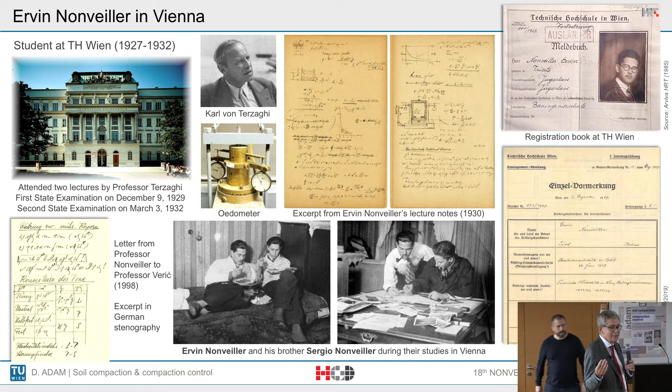If you look at what Professor Nonveiller and Professor Terzaghi left behind, here's an impression from the year 2019. Here, beneath, the president from this time, Igor Sokolic, visiting us in Vienna. We had the Austrian Geotechnical Conference with the Vienna Terzaghi lecture together with Professor Brandl. Then some weeks later we saw each other again in Omiš, with the 17th Nonveiller lecture of Professor Bala from Italy, and the amazing presentation from Professor Verić. It was really wonderful work.

You even presented that time about Terzaghi and the Croatian connection, and we talked about Terzaghi in the laboratory a lot, before and after. I told Professor Verić there were just a couple of weeks remaining to visit the old laboratory, because we were moving it. So a Croatian again was the last one to see our old laboratory, founded by Terzaghi, during his visit to Vienna in May 2019. This, for instance, is the first triaxial apparatus which was developed. But no worries, we could save exactly this room, and during the next international conference, which will take place in Vienna in 2026, we will officially open the archive of Terzaghi, so everyone who is interested can see it again. But you were the last who could see it in person before we moved the laboratory.

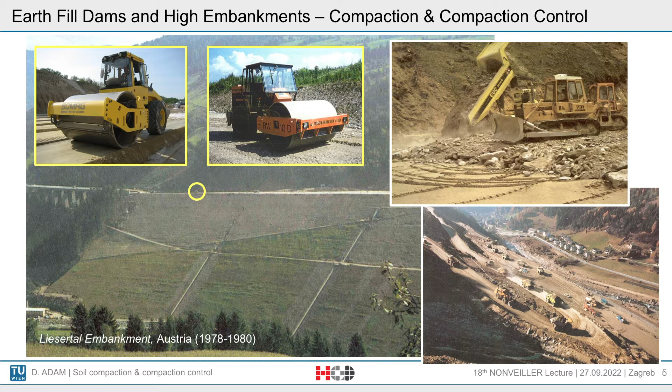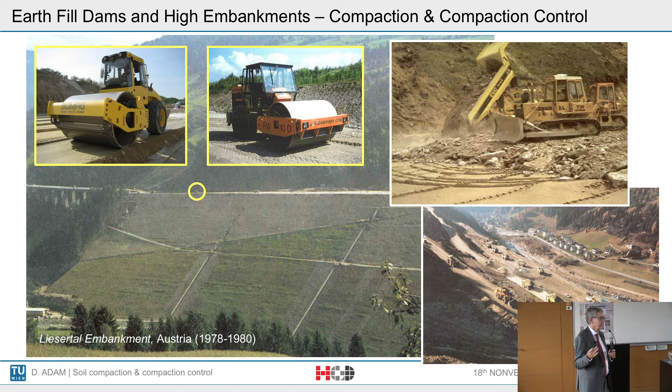This is an old roller, this is a modern roller. At this time, in the end of the 70s, the technology was right at the beginning, but nevertheless it could be done that the self-settlements were in the range of about 8 to 15 per mil, which is not too much, taking into account that the whole embankment was made of clay, silts, and silty sands - less suitable material, but finally it worked.

As already mentioned, it was in October 1992 when Professor Brandl invited me to form this group for soil dynamic research. Within those 30 years we did a lot of projects I've listed here. I won't go into detail - it's not possible to talk about all of them, so I have chosen some of them.

I will definitely talk a little about the dynamic load plate test as a spot test, but the main part of my presentation will cover dynamic roller compaction and continuous compaction control, as everybody can expect. I've also seen in the poster - thanks for designing it so nicely - that you obviously have expectations with respect to this topic.

Then, if there is time, some words about deep vibro compaction and new developments - it was also a wish of Igor to talk about that. And finally, recent research on compaction in railway engineering, in particular about condition-based tamping process.

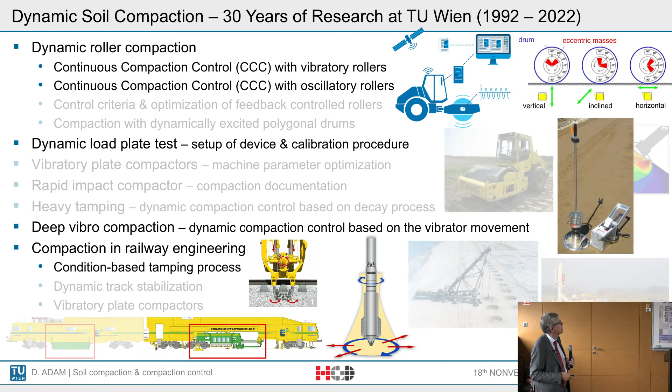But before we start with all these developments, I would like to give an overview of the fundamentals of soil compaction as a kind of warm-up. Most of you will be familiar with this, but I think it is necessary to be aware of what it means to compact, because we always have to deal with a very special material, and this special material is soil. We can classify soil according to grain size, as we all know.

So we have the coarse-grained part and the fine-grained part, but moreover we have to take into account surface roughness and grain shape - which is well known because it's visible to the eye for coarse-grained material, but not so obvious for fine-grained cohesive soil. Taking into account mineral content, we also have to look at consistency and plasticity - properties which significantly influence the behavior of the soil.

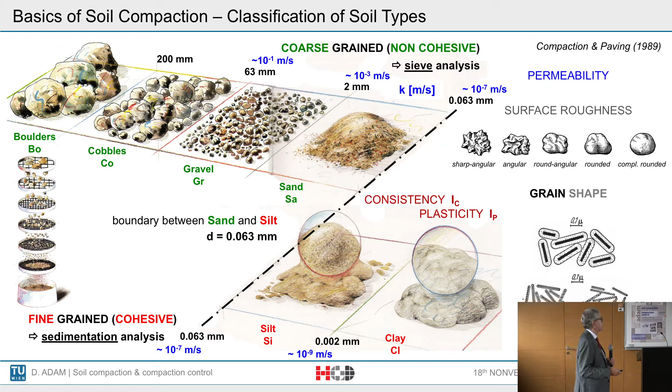Moreover, the influence of water and permeability is also a very important aspect that always has to be taken into account. But it's not only the grain size, it's also the grain size distribution which has to be considered.

If you look at some typical grain size distributions - mainly gravels, uniformly graded, intermittently graded, or well graded - they are all very suitable materials for embankment construction, dam construction, and earthworks in general, so they can be well compacted. If you look at sands - yesterday we had an interesting talk about that - sands are problematic soils to compact, so some other aspects have to be taken into account.

The mineral content again - we should always try to have some kind of cementation, but it depends on whether the soil is calcareous or not, for instance. Or if possible, we should try to have a very specific water content to gain a kind of apparent cohesion.

Nevertheless, sand compaction is a very difficult task. Widely graded grain size distributions are well suitable, and we also have to focus on fine-grained soils, which are usually problematic to compact, and sometimes it's necessary to stabilize them with lime, cement, etc.

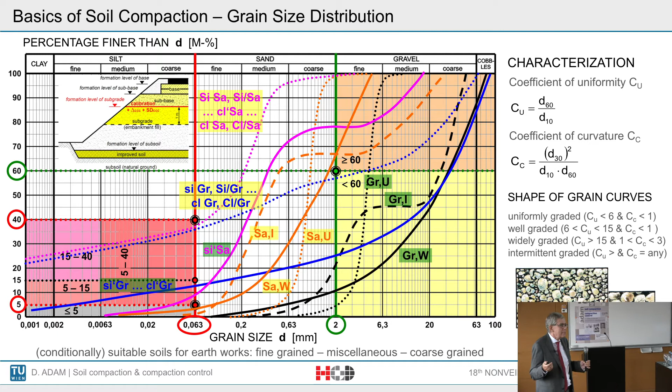But we always have to handle all these kinds of materials because we just have to use the materials which are available. And if they're, for instance, only clay silts, then we have to deal with them. That is the reason why I have to focus on all of them.

But it is not grain size distribution alone. Moreover, we have to take into account that soil is a three-phase system, to say it in simplified words. We all know this phase diagram shown here on this slide. Besides the soil particles, we have voids, and the voids are partly or fully filled with water. In the dry condition, there is only air in the voids.

If you look at the structure of the soil, here in both graphs below: fine-grained soil with a closed void space but nevertheless a quite large void space, and a coarse-grained soil with an open void space but a relatively small void ratio. We can define a lot of numbers - for instance, the degree of saturation, or the void ratio, as presented here.

Taking these factors into consideration, we can look at one of the most important relationships with respect to compaction: the dry density depending on the water content. This can be shown graphically here. Every one of us knows this dry density over water content relationship.

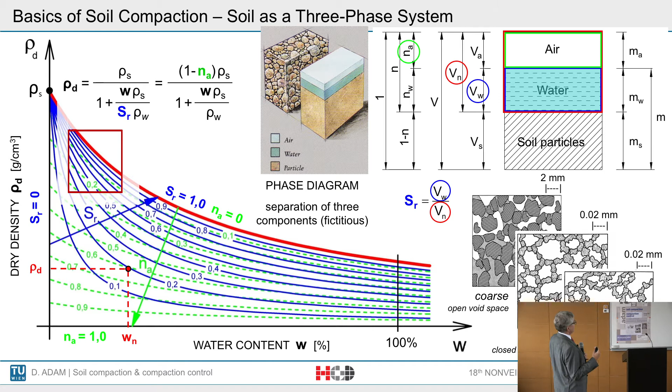If you look into detail of that, we can get insight into the compactability of the soil, into the compaction procedure, which is usually done in the laboratory with the Proctor test.

We all know this test - the standard Proctor test yields, for instance, this Proctor curve. That means there is an optimum water content where we gain the maximum dry density. If we apply more energy, as presented here in the modified Proctor test,

we see what we expect: the dry density is higher, but the optimum water content is lower. The explanation is quite simple - the void volume is much smaller and there's not so much space for water there.

What we can see here is the line of full saturation, and here the line for a saturation degree of 70%. The maximum dry density is always in between here. So what do we get out of this test?

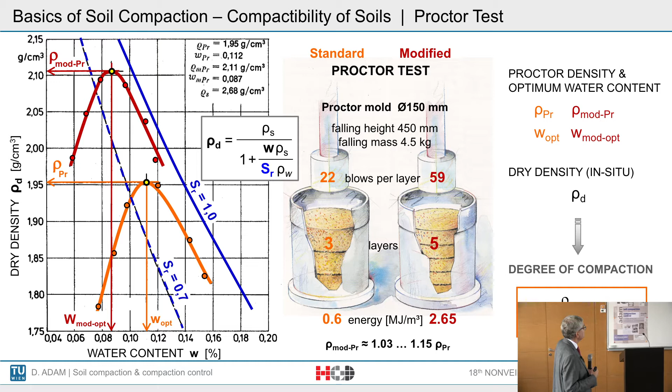Proctor density and optimum water content, both for the standard and modified Proctor test. When we compare it to the dry density which we gain in situ, we can define the degree of compaction as presented here. We'll go into that a little bit later because it's an important relationship.

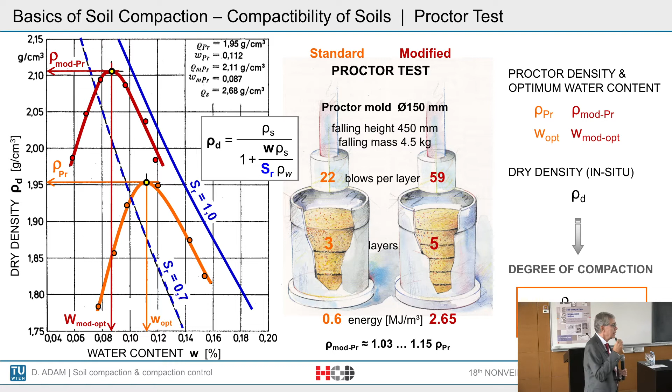This Proctor curve is a real property of each soil, and for each soil you will gain a different curve. On the left-hand side, we can see typical Proctor curves for gravel and sand. For sands, they're very flat, very shallow - that means there is not a big compaction potential.

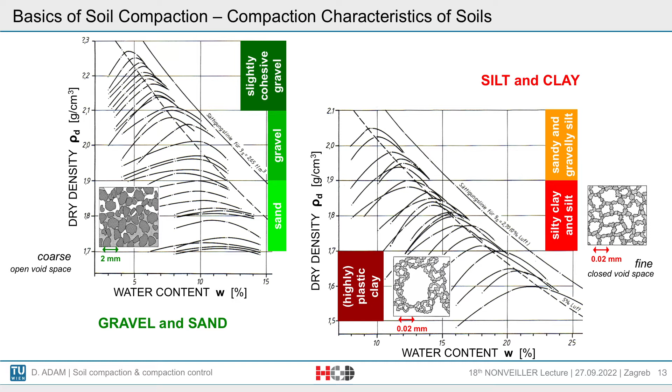We can also see that the dry density which can be achieved is quite low. If we look at the right-hand side, the silty clays, in general the level of dry density is lower. There is one main reason for that: the closed void space, so more energy is needed to gain higher compaction, but the energy applied is defined by the Proctor test, so the maximum dry density we can achieve is definitely lower.

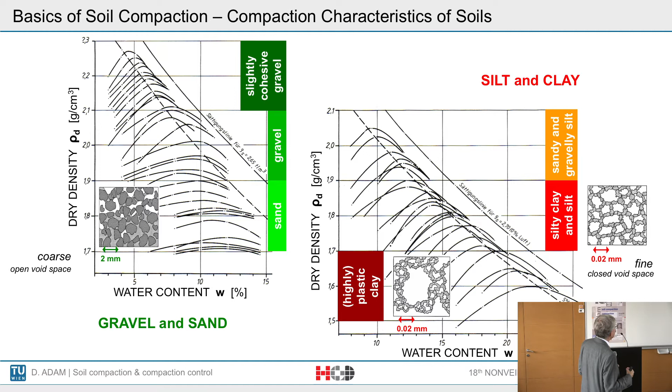If you look at the general properties of soil, the typical soil characteristics, we can see that gravel and sand on one hand - the coarse-grained soils - and the silts and clays, the fine-grained soils, behave totally differently.

I do not want to go into detail of that because I think you will get all the slides afterwards to have a view on that. But I would just focus on

the compaction, because if you take into account how compact gravel and sand on the one hand and silt and clay on the other hand, we see totally different techniques have to be applied.

So for coarse-grained soil, what shall be done? A virtual elimination of internal friction. That means a rearrangement of particles into denser fit, as we can see here, for instance. Vibrations are most effective for compacting gravel and sands, and that is the reason why it makes sense

to apply vibrations, that means a dynamic load, to compact gravel and sands in the best way. On the other hand, if we have a look at the structure of silts and clays, what do we have to do? We have to exceed the cohesion forces. That means we need to squeeze out the water and the air out of the closed voids. Vibrations, dynamic loads, are definitely not the best technique to achieve this. The best one is to apply a dead load, a static load, or to open the closed void space by kind of a kneading process.

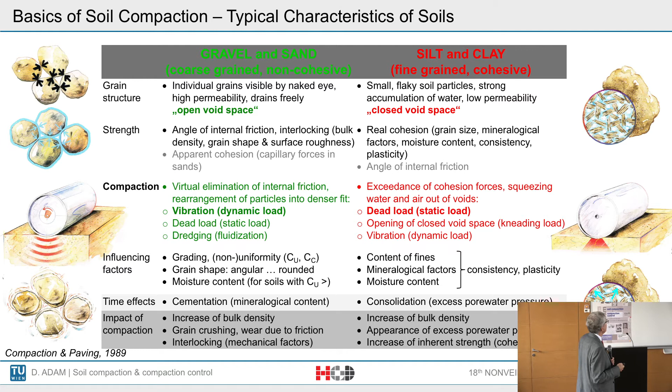There are many aspects influencing this compaction, but we will definitely talk about dynamic compaction a little bit later on. Before we do this, I would like to talk a bit about the conventional compaction controls - that means the state of the art, but also the innovation in this field.

So we all know that we can directly measure the density. On the one hand, we can perform the Proctor test - usually the standard Proctor test, but sometimes also the modified one. So we get the Proctor density, and this Proctor density we compare with the density determined in the field, which can be done by replacement methods, sand or water for instance, or tube sampling for cohesive soils, or the application of the nuclear gauge method.

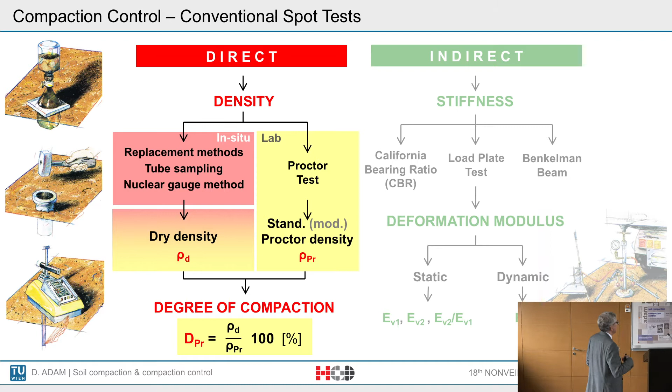If we compare the dry density from the field with the Proctor density, we get a degree of compaction multiplied by 100%. But we all know that this kind of testing is not really very reliable - it is spot testing. I was never happy with that, and I would say a bit better method was to measure stiffness,

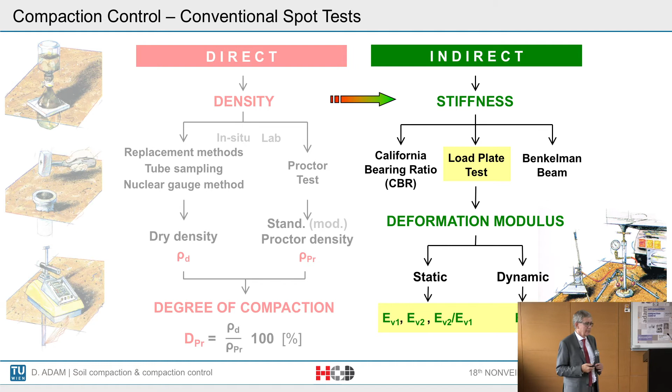because what we know is, the denser a soil is, the stiffer it reacts. So this is one basic principle - that means we can also indirectly measure compaction by stiffness measurement. So we have different possibilities. California bearing ratio, we usually don't use in Austria. Benkelman beam is an anachronism, it's decades ago that we used it.

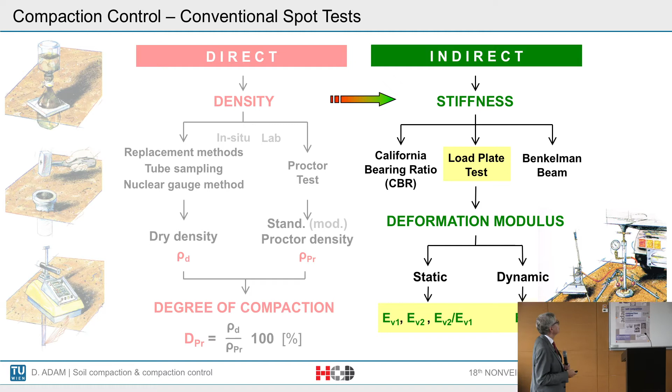So we mainly use load plate tests - on the one hand static ones, on the other hand dynamic ones - in order to determine the deformation modulus for different loadings. Before we go into detail on that, some words about the comparison of density measurement and stiffness measurement.

Here at the top we see a typical compaction curve from the Proctor test and the requirement of 97% of Proctor density. And below, we also can draw the so-called transformed compaction curve, which is derived from stiffness measurements. We can see there is no coincidence in the requirements. So we cannot really say if we have achieved sufficient compaction, it's also stiff enough, and the other way around. If you're outside of this whole area, there is a common rejection.

How do we deal with these yellow marked areas? Here on the left-hand side, we have sufficient stiffness but no sufficient density, so stiffness measurement pretends, let's say it that way, sufficient density. And here on the right-hand side, the other way around - there is no sufficient stiffness but sufficient density, and in this case density measurement pretends sufficient stiffness, but it is not existing.

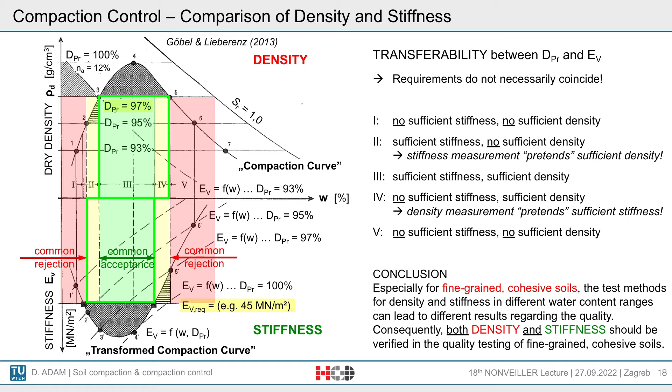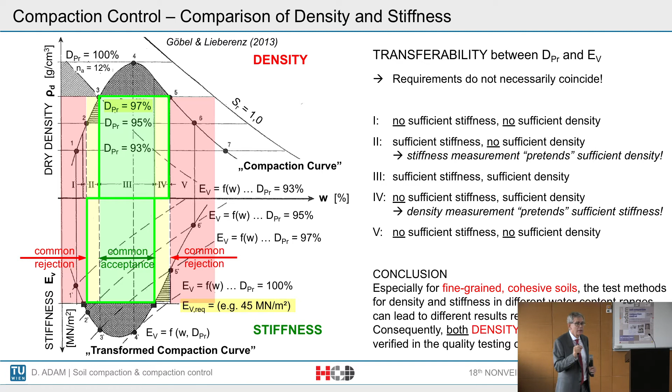So what is the conclusion out of it? This is valid especially for fine-grained cohesive soils. Always both density and stiffness should be verified in all the quality testing processes, in particular for the fine-grained cohesive soils. Many people in practice are not aware of this, and also in theory they're not aware of this. Stiffness and density are not exactly the same - they are correlating, but we also have to take into account what is the requirement, what is the definition, what would we gain, stiffness or density.

So coming now to the spot tests.

Static load plate tests - every one of us knows about it, and I've learned that also in Croatia, this is one of the main equipment to do all the testing in earthworks for road embankments, dams, etc.

Sometimes also this compaction rate is applied. To be honest, this is soil mechanical nonsense. I know it is in all the standards, all over the world. It's not time to talk about this in detail, but if you're interested, we can discuss it later. We did a lot of research on this, and we tried to expel it from the standards, but it's not possible, even not in Austria. I remember Professor Brandl talked about this too, and I can imagine he talked about it in his first Nonveiller lecture as well. I've learned his topic was more or less the same as mine - in 2000, when he delivered his first presentation.

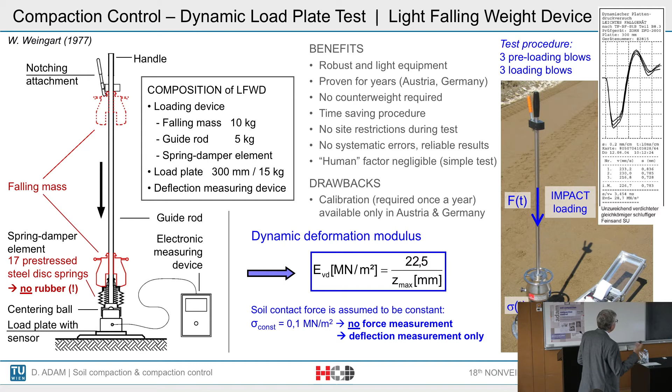So we did a research project to get insight into whether and why this simplified evaluation is also reliable. In the next three slides, I want to show you how we do our research in soil dynamics. We always do large-scale experimental tests compared with calculations.

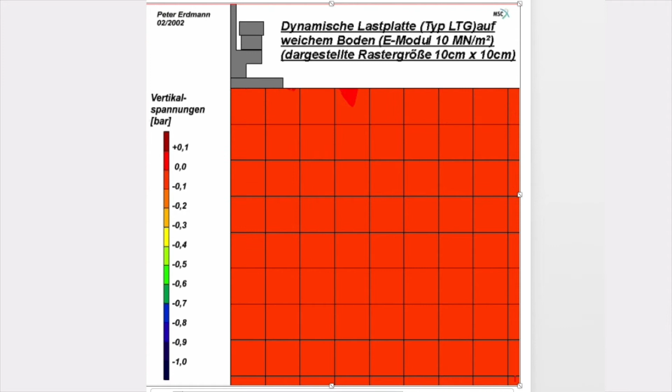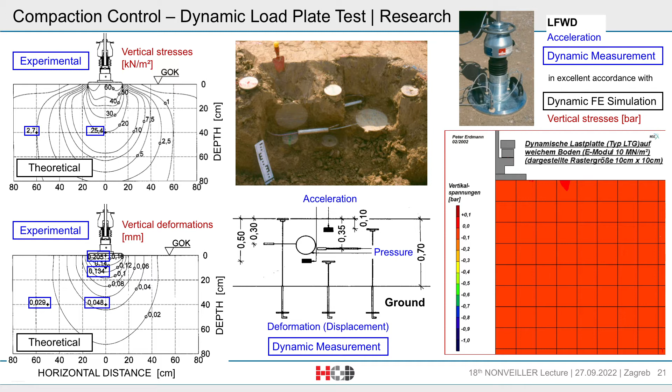On the other hand, both on the equipment and also in the soil, we measure acceleration, but also pressure, deformations or displacement, everything dynamically with very high precision. The comparison on the left-hand side shows that the calculation and the experimental results really fit very well.

So what did we do? We have the free body system here, and we take into consideration the upper one. We have both the soil contact force and also the soil contact pressure and the plate deflection. We did the calculation, and what we saw, due to a relatively high variation of the modulus, was that the variation of the soil contact force was insignificantly low, so it was more or less constant. At the same time, there was a significant variation in the plate deflection.

So a quite easy conclusion out of that: we always have this soil contact force of about 7 kilonewton, corresponding to a stress of 100 kPa. That means it is right that no force measurement is required because this number is more or less constant, and only deflection measurement is necessary. That means keeping this stress constant is okay, and from this point of view the simplified formula can be applied.

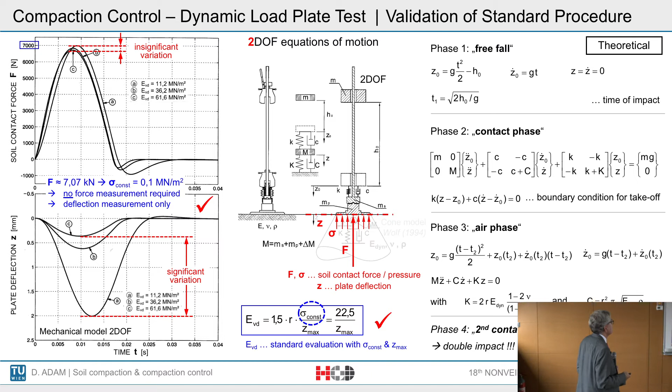That means a linear elastic spring and a viscous damper, and we feed this simplified model with the measured acceleration of the plate, which is integrated to get the plate velocity, and integrated twice to get the plate deflection. So we have the plate deflection here, and the soil contact pressure we can calculate simply from the equation of motion, which is well known.

But what did we do now? We just take into account the elastic part, we separate it. Why do we do that? Because also in the simplified calculation we just consider a constant stress. That means we compare this equation to each other — on one hand we have the so-called deformation modulus K determination with the elastic part, we can see here this part, and what we get out of it is a linear relationship.

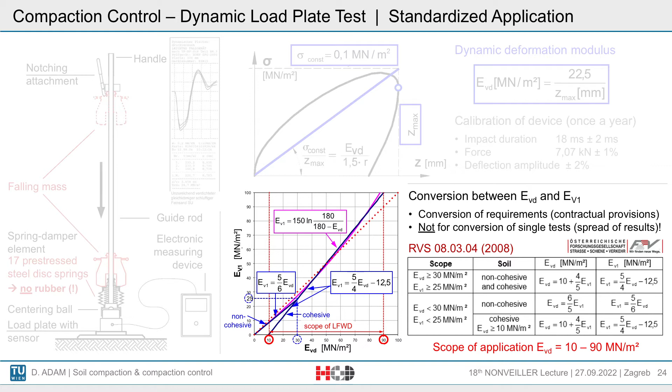We can see a very cleverly tuned system already done in 1977 by Wolfgang Weingart in Eastern Germany, with a very simplified evaluation. There is only one drawback, maybe here in Croatia if you would like to apply it: this equipment needs a calibration once a year.

This calibration can only be done now in Austria and in Germany. But I've seen it's not a problem. We do the calibration here in Vienna. We get a lot of load plates from Hungary and other countries, so it should be done. Maybe you install also such a calibration procedure here at the university or wherever.

Then I think you have a very good alternative to the static load plate test. I haven't used the static load plate test now for almost 15 years, because from my point of view it is an anachronism. But if you have nothing better, it is the best one to apply.

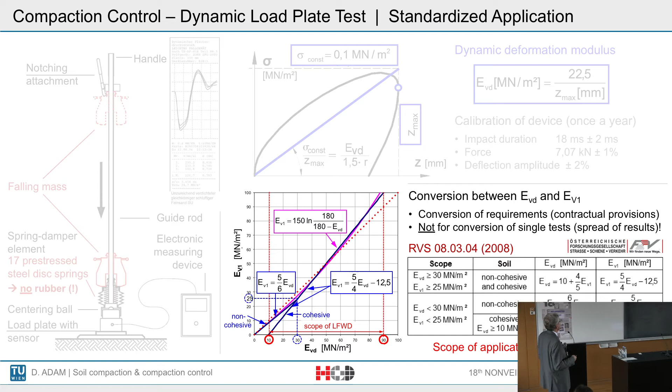But this would be a real progress to apply this dynamic load plate test. You have only advantages. It's a very short procedure. You have no human aspect, etc. But there are even better techniques I would like to talk about now.

Now I come to the core part of my presentation, to the dynamic roller compaction, and sure, the roller integrated continuous compaction control. It's always a pleasure for me to talk about it, because it was here the topic of my PhD thesis long time ago.

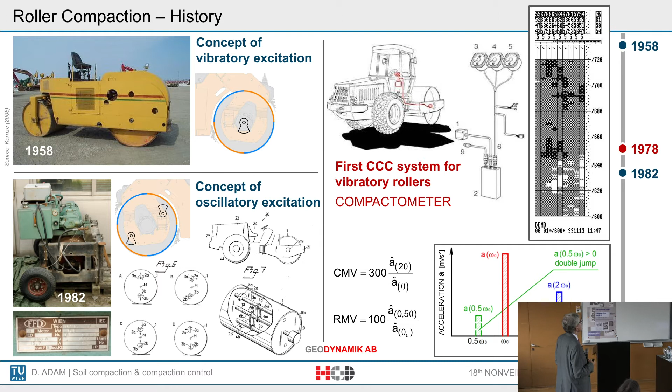But having a look to history, the concept of vibratory excitation was already established in 1958. So it's on the one hand quite long time ago, on the other hand it's not so long. Precisely 20 years later, the first CCC system for vibratory rollers was developed from the Swedish company Geodynamik AB. Just 4 years later, this small company of 7 people also developed the concept of oscillatory excitation.

It was at Otok Rab, and I remember well as if it was yesterday, when I was playing in sand every day in the morning. After the flood was over, the sand was wet, and it was not possible to construct nice sand castles, because the sand was flowing through the fingers. Then during the day it was made possible, and I realized as a 5 year old guy there must be a connection with water. So it was drying up a little bit, and then we built this, and we could even construct tunnels. It did not collapse, but in the evening, when the sun burned down and it dried out, it collapsed.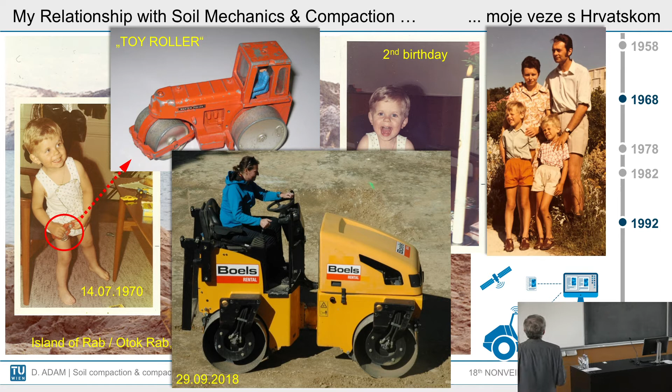Yeah, so 4 years ago, and you can see she had really fun with compaction. Yeah, so obviously it was laid into my cradle to behave with soil dynamics, and especially with rollers. Okay, coming back to some more serious aspects.

Which rollers are available nowadays? On the one hand, static rollers, on the other hand, dynamic rollers. So we'll just talk about the dynamic rollers.

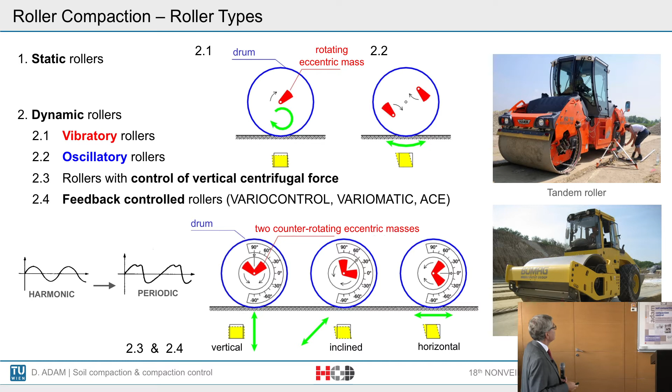Vibratory rollers have one rotating eccentric mass at the axle. Oscillatory rollers have two eccentric masses apart from the axis but rotating in the same direction. Then we have rollers with control of the vertical centrifugal force. This means there are two counter-rotating eccentric masses, and the whole excitation unit can be rotated in order to gain exclusively vertical, any inclined, or exclusively horizontal excitation. So it is more or less a combination of a vibratory roller and an oscillatory roller. The last step in development was the idea of the so-called feedback-controlled rollers, which I will also talk about briefly.

Going a bit more into detail about vibration, vibratory compaction works in the way that the eccentric mass in the drum axis is rotating in the form of a circular translatory vibration of the drum. So we gain mainly a vertical loading and a better compaction depth compared to all other systems.

We have to take into account that there are 5 different modes of operation, which I will talk about on the next slide. But first of all, let's have a look at the oscillatory compaction.

There are 2 eccentric masses now. They're eccentric but point symmetric to the axis, meaning the distance to the axis is the same. They have the same sense of rotation, forming a sinusoidal torque around the drum axis, meaning a kind of shear force is produced. The main advantage is that there are very low ambient vibrations due to that.

There are also some modes of operation, which I will not go into detail about. How do we apply vibratory rollers? More or less for all dynamically compactable soils and materials, meaning, as we already learned, coarse-grained materials, mixed-grain materials, and in some cases also fine-grained materials. It is the mainly used roller worldwide.

Oscillatory rollers are employed in the vicinity of sensitive structures, meaning near bridges or in urban areas, in order to reduce vibrations. It is a perfect tool to seal surfaces, on the one hand for asphalt, and on the other hand also for mineral base layers.

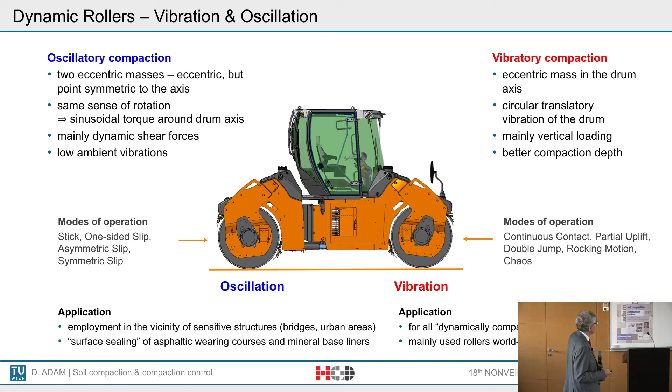If you have a look now at the modes of operation of a vibratory roller, this was one of the main outcomes of my PhD thesis in 1996, already a long time ago. We found out that there are 5 different modes of operation. So there is continuous contact.

This is the soil contact force. There's always contact between the roller and the soil. And if the soil stiffness is increasing, there is a partial uplift, meaning there is a take-off, an air phase, a very short one, within every excitation round. And if the soil stiffness gets even stiffer, then we have the operating mode of double jump.

What does double jump mean? You can see only every second cycle of excitation there is a repetition of the signal. That means there is a heavy impact and a light impact following it, and in between we have a quite long air phase.

About rocking motion and chaotic motion, I don't need to talk much, so the drum becomes imbalanced. If you think about application of continuous compaction control, it can be ideally applied within the operating condition of partial uplift, also within continuous contact, depending on the system, maybe with double jump, but definitely not for rocking motion and chaotic motion.

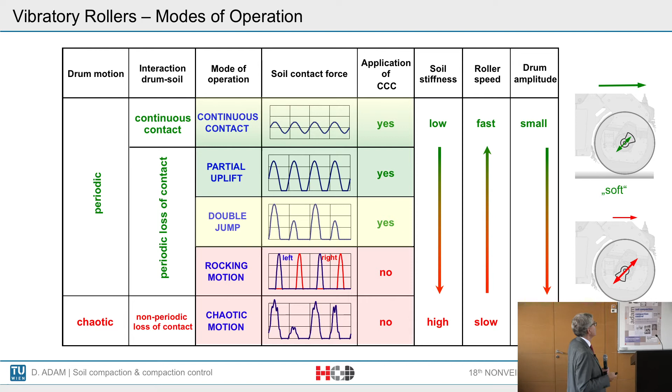And what does continuous compaction control mean? It is nothing else than the measurement of the motion behavior of the drum at the bearing of the drum with accelerometers. Receiving such signals, we can see here the acceleration, which conforms to the force.

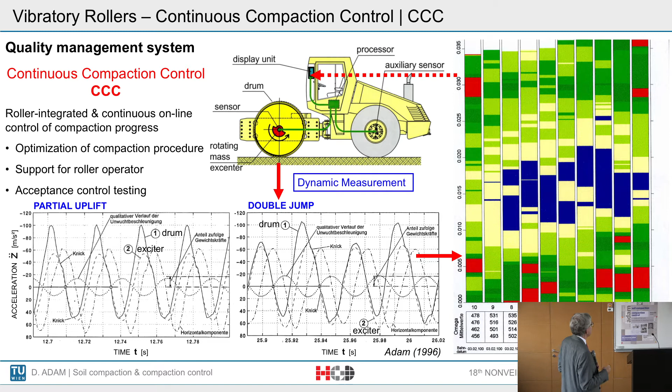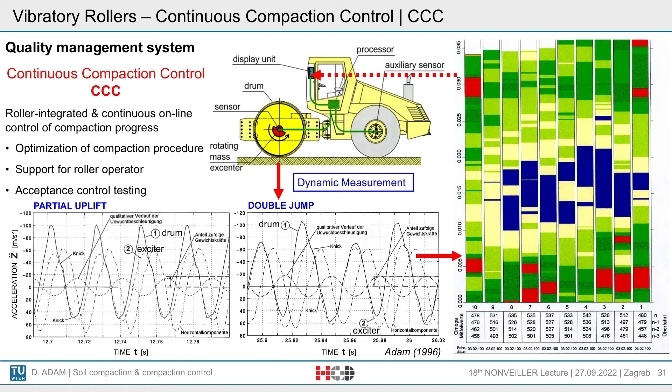Here, this line, number 1, is the acceleration of the drum. Here, the dotted line is the exciter, and the area between represents the soil contact force—on the left hand for partial uplift, on the right hand for double jump. Now, if we evaluate exactly these acceleration measurements, we get continuously, all over the compacted area, such a picture.

That means different colors representing different values and stiffnesses. And if you have a look into detail how the systems can be applied, on the left-hand side above, we...

We have the first indicator for vibratory rollers, the so-called compactometer value, which is evaluated in the frequency domain. That means we just compare the amplitude of the double excitation frequency with the amplitude of the excitation frequency, forming the so-called compactometer value. All the other systems are based on evaluation in the time domain.

The first of those was the so-called omega value, based on the evaluation of the energy transmitted to the soil. The area between the soil contact force-displacement curve is the energy transferred to the soil. Further developments show the Evib value, which is the inclination of the soil contact force-displacement relationship during the loading phase.

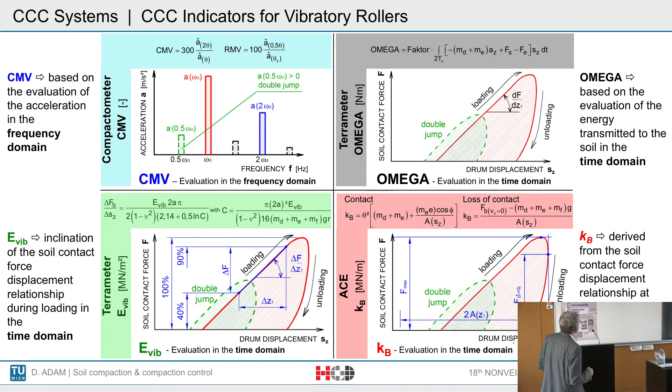But as you can imagine, this is not the real stiffness, because this is just the loading response. It's not the stiffness, because the actual stiffness lies somewhere in between, as we already saw in our research on the dynamic load plate test. The kB value is very similar—it's derived from the soil contact force-displacement relationship at the maximum drum deflection. So we have four systems, and we really had to check whether they reveal stiffness, compaction, or something else.

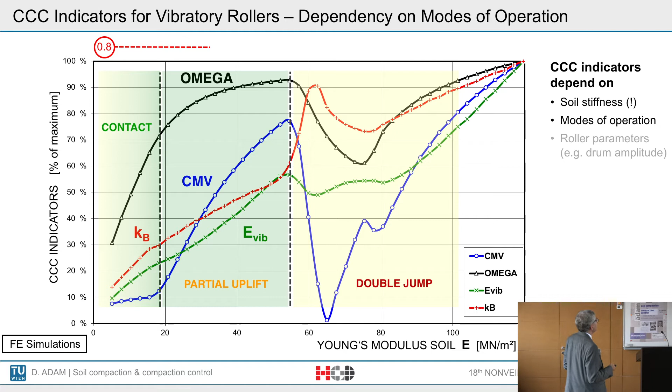And what does it depend on? The modes of operation. We have contact with partial uplift, and contact with double jump. This is the answer to why continuous compaction control should always be applied during partial uplift—then all four indicators give reliable results.

So we did the research—it's not so long ago, just a couple of years, about 7 years ago. We investigated the dependency on all other machine parameters and operating parameters. For instance, you can see here an artificial weak spot, and all CCC indicators detect this weak spot.

So we have here a variation of roller speed: 2, 4, and 6 km/h. What we can see is that, in tendency, the values get a bit lower, meaning the soil seems to appear softer at higher roller speeds. The time domain-based values—omega, Evib, and kB—are obviously less sensitive compared to the frequency domain-based CMV.

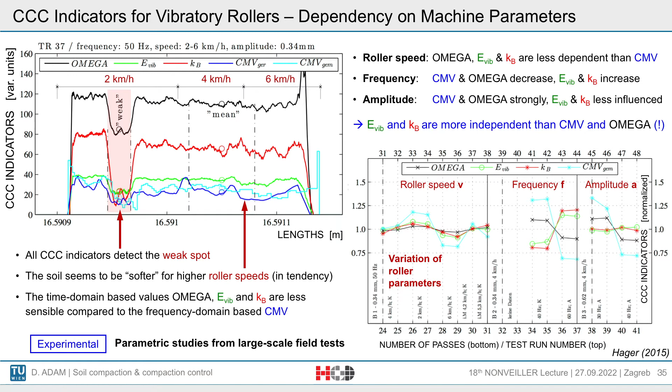We did some more variations, for instance of frequency and amplitude. Looking at frequency, CMV and omega decrease while Evib and kB increase. Looking at the amplitude variation, CMV and omega are strongly influenced by the amplitude, while Evib and kB are more or less uninfluenced.

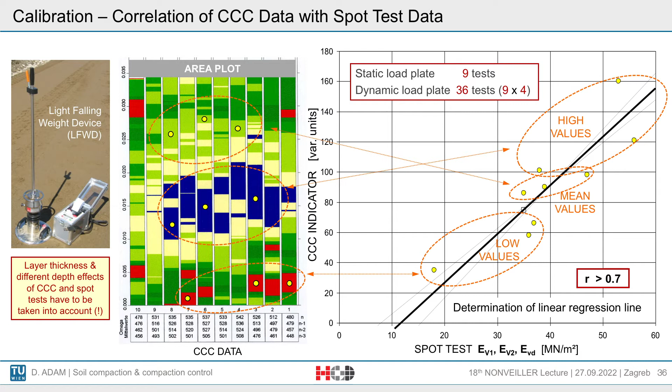This is one of the hurdles in applying CCC, because we only get relative values, not absolute values like the static or dynamic deformation modulus from the load plate test. So what to do? There is a simple answer: do a calibration.

But this calibration has to be done not for every layer, but for all typical soils. And we have to take into account the different depth effects between continuous compaction control—which is about 1.5 to 2 meters—and spot tests like static and dynamic load plate tests, which only reach 50 to 60 centimeters. So there's a real gap in between.

We have to take that into account. But nevertheless, we can do it if we know what we do. And what we recommend now in our standard is to select low values, which are the red areas, to select mean values from the blue areas, and to select high values from the green areas. So we can determine the linear regression line, and if the regression factor is larger than 0.7, then it is okay.

And what we are doing now, we are setting limits. So we start with a reference modulus. For instance, this is 35 meganewton per square meter, just to give you an example. And then we have a procedure defined in our regulations already from 1999 to gain a so-called 80% minimum value, a minimum value, a mean value, and a maximum value.

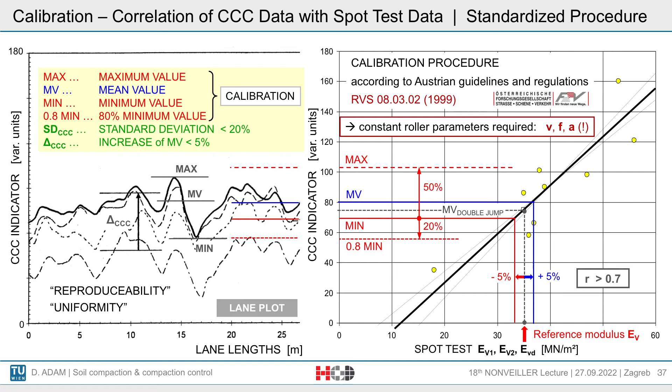And if we compare it now with a typical result, with a lane plot over 25 meters here, then we can see 4 different roller passes. We can clearly see the increase of them, the first, the second, the third, and the fourth. We can clearly see that the results are reproducible, and we can have a look if they're uniform or not. Here they're obviously not very uniform.

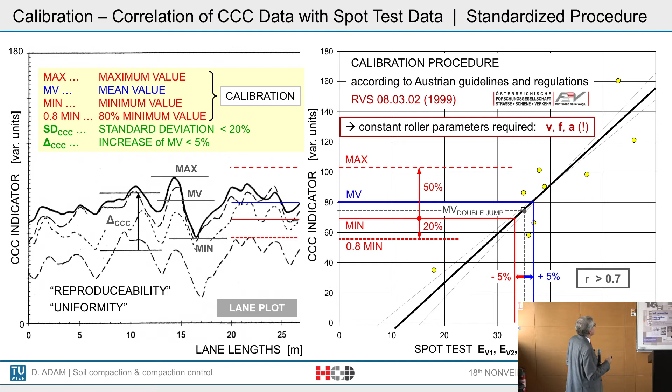That means we have two more aspects we can take into account. On the one hand, the increase of the mean value. If it is less than 5%, almost no more compaction is possible with this applied roller. And we also can define the standard deviation. The big advantage of these two aspects is that no calibration is needed for them. For all the others, we need a calibration.

So having a look, concluding to all the procedure, what has to be done in the beginning: first of all, measurements, setup of correlation according to the standard we've already designed, as mentioned in 1999, and then setting of the limits. It is important to define the lanes, the positioning of the roller. Nowadays, it is done GPS-based, so it is quite simple.

And now we start. With the first pass, what we can see here, a lot of red spots. That means, obviously, insufficient compaction. So we have a limit check here of all the defined limits. We have a compaction progress check, and we have the uniformity check.

Okay, here, obviously, we see no sufficient compaction, second pass. Looks much better, but still some red spots here. Third pass, everything's green. And the limit check says, okay, everything's okay.

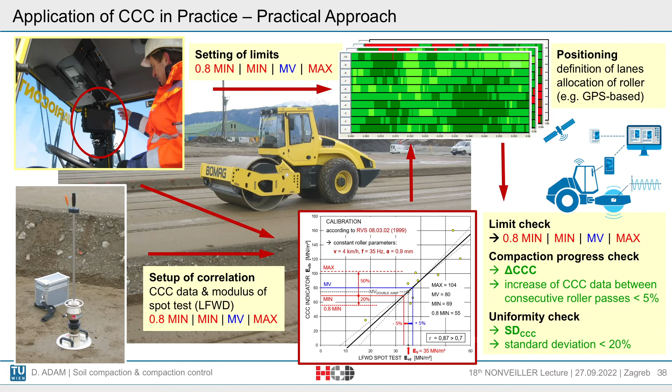So you can see the main hurdle is the calibration. The application is quite simple because the tools are developed in a way that you can apply them really in a very simple form. But what to do with the calibration? We were thinking about this in the last 10 years, how to expel calibration here.

And that is, what did we do? We developed a totally novel CCC indicator, and the idea behind it was to develop it in a way that is more or less roller independent of machine parameters. So just to give you a very simple presentation on that, it's the first time ever that I do it here, because this work was recently finished. The oral examination will take place in about one month, so it is really brand new.

First of all, the mainly vertical loading of the subgrade caused by the vibrating drum results in a measured soil response. That means already the well-known force displacement diagram. We have the loading phase, maximum force, unloading phase, the takeoff, that means the air phase, and then the drum comes back, hits the ground, beginning of contact again.

In the second step, the measured motion behavior of the drum now gets applied to a pure geometric model, taking into account plasticity of the soil. So we take into account the plasticity of the soil. That is new, but I think it is important because compaction is always plastic deformation. So it is a very complicated procedure I do not present here.

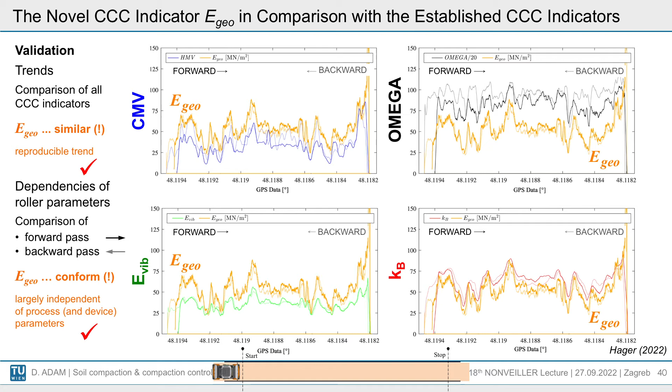What we did was a comparison between the forward pass and the backward pass. As you can see, the forward pass and the backward pass, unfortunately we cannot see it quite well here. So the backward is the lighter line, and we cannot really make it out. I'm really sorry for that.

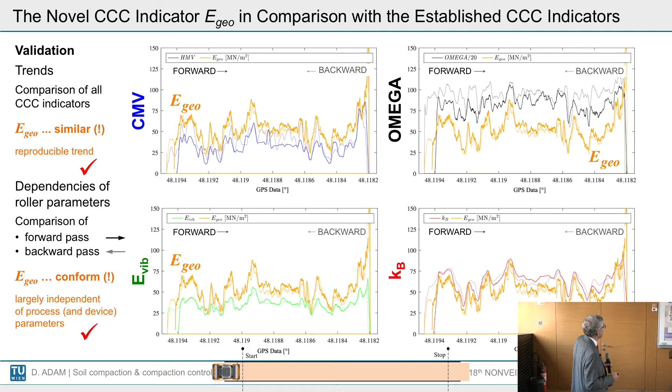We can see for each Egeo it is largely independent of this parameter, and we could show this for all the other process parameters as well. That means we really found a fully independent value, and this value is a real potential for the future, for the case that we do not need any calibration anymore.

What is the background? Just to summarize, Egeo describes the Young's modulus of the soil, and thus a physically based soil stiffness characterizing quantity with corresponding unit. It is a largely device and process parameter independent CCC indicator. And one more advantage: it is definitely insensitive to the modes of operation.

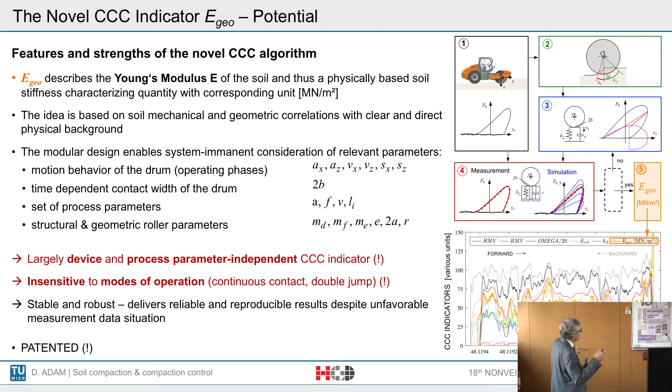That means it works for continuous contact as well as for double jump, and we do not have all these hurdles to overcome this transfer zone between continuous contact and double jump itself.

Just finally, another development, just on one slide: we also developed a novel system for oscillatory rollers, just to give you a very brief overview. So we measure once again the accelerations, both in the ground and also at the bearing of the drum, that means here at the axis.

We could see a very characteristic behavior of the soil accelerations, which replicate more or less in the same way in the bearing of the drum, forming this nice eight shape. This is the eight shape of the accelerations in horizontal and vertical direction for the second pass.

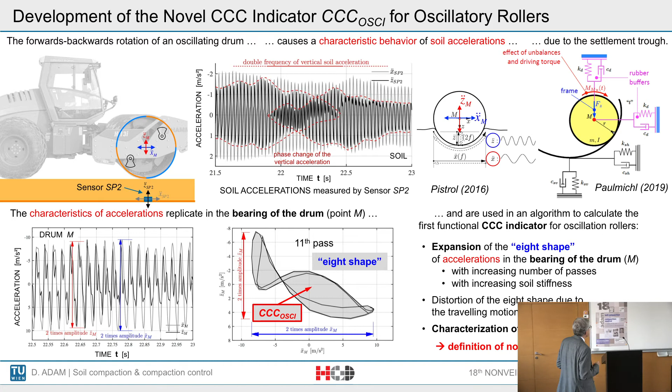And we can have a look at the 11th pass. What we can easily see, if we compare them to each other, is that they're quite similar. But here, the maximum acceleration amplitudes both increase, and thus also the area in between increases. So we have found a very nice and very simple indicator for oscillatory rollers: it is just the surface area within this eight shape of the acceleration of the bearing of the drum.

Coming to the end of this topic, I mentioned it briefly: rollers with control of vertical centrifugal force and feedback controlled rollers. What does it mean? We have already seen it before. Now a combination between a vertical and a horizontal, that means between a kind of vibratory and a kind of oscillatory drum. And we can use both advantages of those if we just rotate the whole excitation unit.

This is usually done by the roller operator itself. That means if he's an experienced one, he exactly knows how to adjust the exciter unit, depending on the soil type, the layer thickness, the effect of vibration on adjacent houses, whatever. But we need experienced roller operators. If we do not have them, or even if you would like to optimize the process, we can automatize this.

That means we can have an automatic control, but we need to define control criteria. These are quite simple. I think every one of you knows now what is the main one: to prevent double jump. That means the main control criterion is exactly this, the prevention of double jump, or we could also define the maximum soil contact force.

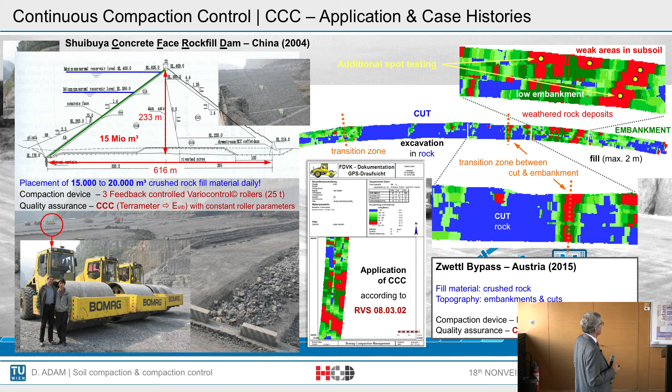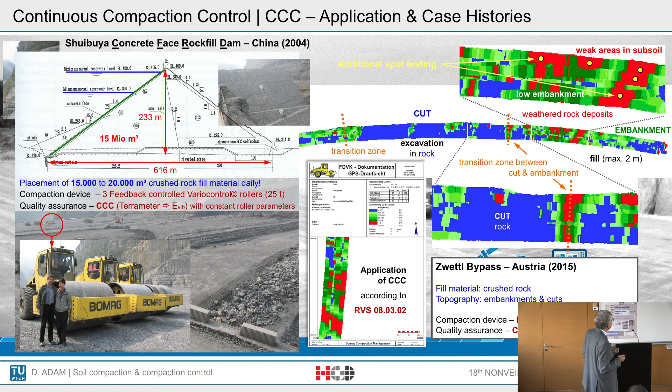Here you can see little spots - these three spots are the rollers which did all the compaction. The main challenge was that daily, 15,000 to 20,000 cubic meters of material had to be filled and compacted, and this had to be done with three rollers. This was only possible with feedback controlled, direct control rollers, the very heavy ones with 25 tons. And quality assurance was done with other rollers applying continuous compaction control, in this case with constant roller parameters applied.

Summarizing continuous compaction control: beginning in the year 1978, work and roller integrated online high quality control. We have continuous control covering all the compacted area, which is not possible for spot tests. We have decision-making support, first of all for the roller operator, but also for the site inspector. We have custom quality documentation. It is a standardized procedure in the meanwhile.

For instance, these are the standards in Austria - as already mentioned, the CCC guidelines from 1999, then Earthworks guidelines from 2010, now revised in recent years. You can see the application of CCC is compulsory in Austria for these areas of an embankment, and it is highly recommended to apply it to every part of a dam, an embankment, or all earthworks. The method is economic and time-saving, and it is still innovative, as we have seen with eGeo and the CCC OSCI indicator. What are the present challenges?

On the one hand, the calibration of the roller parameter depending CCC indicators - that means CMV, omega, Evib, kB work - but they need calibration. Unfortunately, it is not established everywhere in the world. That means in many countries, standards are missing.

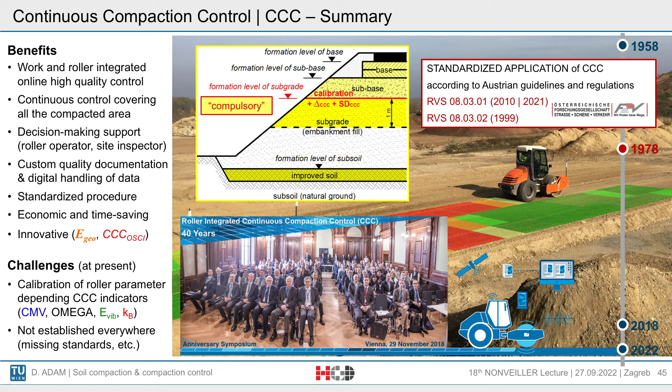It was just 4 years ago that we celebrated 40 years of roller integrated continuous compaction control. Two of my friends from the Croatian Society, Krunoslav and Mensur, were there too. Thanks a lot for coming to Vienna for this event, it was a very nice one. All the people still alive who took part in the development of CCC were taking part in this symposium.

So it's up to you, if it's okay I'll continue with deep vibro compaction, since there was a short discussion with Igor who said it would be interesting to talk about that. At the beginning I thought it might be too much, especially talking about the vibratory integrated compaction control, another continuous compaction control system.

You all know deep vibro-compaction, also named vibroflotation, for deep compaction of soil and homogenization of coarse-grained soil. We activate the soil compaction potential by penetrating a dynamically excited vibrator, facilitating a water feed, and while pulling out in the backstep method - pull out, penetrate again - we compact the soil to a certain extent. What we gain is the so-called compaction funnel, and the water here has to be backfilled, finally giving a homogeneously compacted space up to a depth usually of 25 meters, but there were also projects in Asia up to 100 meters. This technology was patented in 1933 to 1934 by the Keller company in Germany.

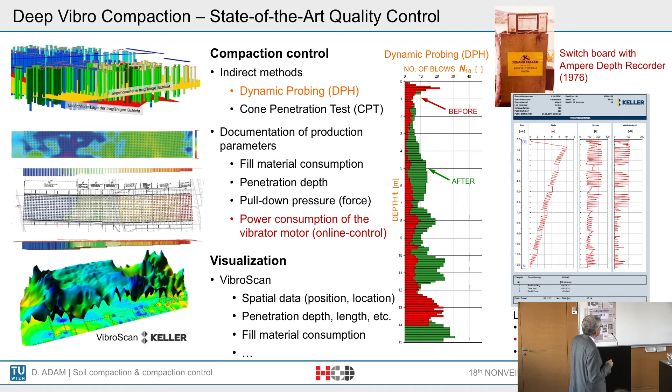For me it was not really satisfying. We did a lot of successful projects all over the world, but always with this before-and-after compaction control - what happens in between, is it sufficient or not? We just know after the work is finished. This is not really satisfying. So what do we do?

We can see here on top the vibrator depth - this is the first penetration. Then we see the backstep method: penetrate, pull out, up to the surface. This is the so-called backstep method.

What happens is our hypothesis: we have a kind of fluidization due to vibration, meaning the grains are in a kind of suspension - that's why water feed is so important. But it's not liquefaction, because there is no pore water pressure, which is one of the requirements for liquefaction. So it's fluidization, which is different. Then we have compaction due to vibration and penetration, so grain rearrangement occurs, and we do this step by step up to the top.

This was one of the really interesting results. We always thought this vibrator was vibrating around the hinge here. No - it's vibrating like a rotational hyperboloid.

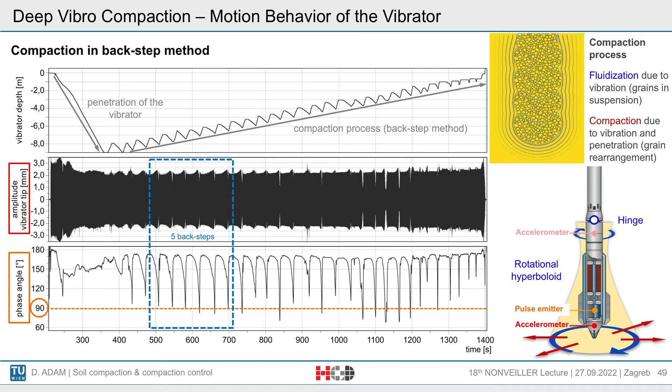Yeah, it is not a straight line. It is this very interesting shape. We measured it from accelerometers here on the tip and here near the hinge. We also measured the pulse with a pulse emitter, the phase angle. So we can see the result here in the middle of the accelerometer in the tip, and we can see the phase angle here down here.

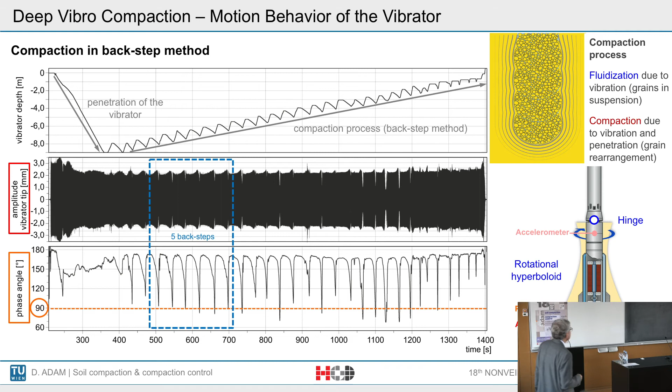What we already can see here, the phase angle is about 90 degrees. And what does it mean if the phase angle is 90 degrees? Resonance. So resonance always has to be taken into account. But I let you know, even now, it is not so important as we always thought before. Resonance is definitely not the leading factor for compaction, for deep compaction.

So if you have a look now to 5 backstep periods, we can see on the one hand periodicity, both for the amplitude and for the phase angle, and we can also see the reproducibility from backstep to backstep. And if you have a look now to one backstep in detail, what can we see here?

We can see 4 phases. Blue one is the lifting. Then we have now the pull down phase, and we see a slight increase of the amplitude, and we see a clear decrease of the phase angle. Then we reach the point of resonance. Then we have the so-called post-resonance phase. And then usually the operator of the device says it's enough.

But what we did, we pushed down. It was almost not possible anymore. There was such a resistance of the soil, but we did it. And what did we get? An overload. And what can we see here? Here, a peak from our pull-down pressure. So this was not really sound for the equipment, but nevertheless we did it.

And then we relieved everything and lifting again. And what could we see from that? This is exactly the same progress compared to eccentrically excited single degree of freedom system.

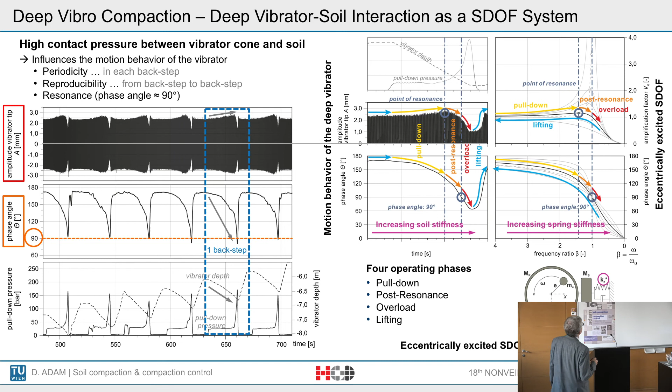So we can conclude from that, okay, when it happens here with a simplified model, it also should happen here, increasing soil stiffness. So we formed a very simple model again. You see a single degree of freedom system in 2 directions, but the same formula. And now taking into account the measured amplitude and the measured phase angle, we get the stiffness. We called it the state-dependent stiffness indicator.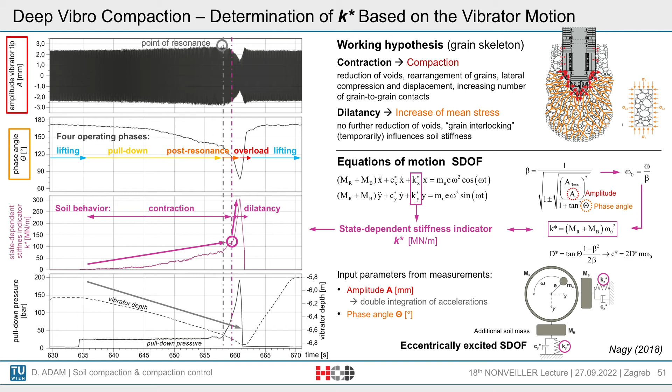So we start with a compaction. And what does compaction mean? Contractant behavior of the soil. That means reduction of the pore volume, rearrangement of the grains. We have lateral compression and displacement, and the increasing number of grain-to-grain contacts.

And then we have a point. We do not have any reduction of voids anymore. Maybe we also get a kind of grain interlocking. It is only temporarily. And a clear influence on the soil stiffness. That means a kind of dilatant behavior, a volume increase of the soil, because it's so heavily compacted, no compaction is possible anymore.

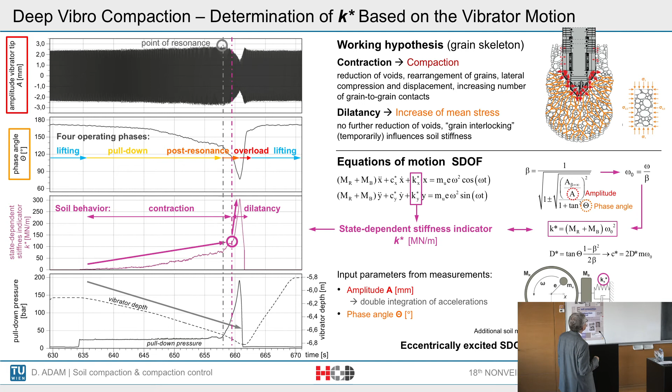And there is a clear point in between we can see here. This is exactly the state-dependent stiffness indicator. So if we have a look at the soil behavior, we have contractant behavior until this point, and then dilatant behavior. And now it is important, does it happen just here for one backstep? Is it comparable to all the other backsteps? And the answer is quite simple. Yes, it is comparable, and we can see it always happens in the same range.

So we have a clear transition zone between contraction and dilation. And if we compare now these results to that of the power consumption of the vibrator motor, this is the graph here. We have a clear linear relationship in between. My skepsis was wrong, and it really works, and it works in a way I was really astonished about. It is a clear linear relationship in between. Okay, here up to the transition zone, that means maximum stiffness.

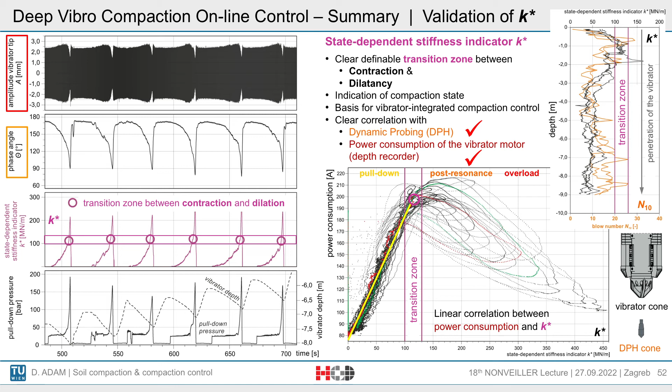And then we have the post-resonance and the overload. This is of clear physical background why there is no correlation. I will not go into detail, but this takes into account resonance of a system, and it's clear that we have no clear correlation here. But I think it's not necessary to talk about this because usually...

Compaction is clearly finished at this point, and the experienced operator knows exactly when he stops. We did nice tests with experienced and unexperienced operators. The experienced ones had a button to push when they thought they had gained full compaction, and it was always exactly this point. The unexperienced did it always in this range, because they thought more compaction was possible, but it definitely was not.

So the power consumption of the vibrator motor, the depth recorder, is okay. So skepticism was wrong.

And in comparison to the dynamic probing, DPH, we can see here the penetration phase of the vibrator. That means no compaction, it's just penetration with vibration, so more or less we measure the virgin soil conditions. And it was amazing for me again, if we take into account the different size of the vibrator cone and the DPH cone, it is more or less conform.

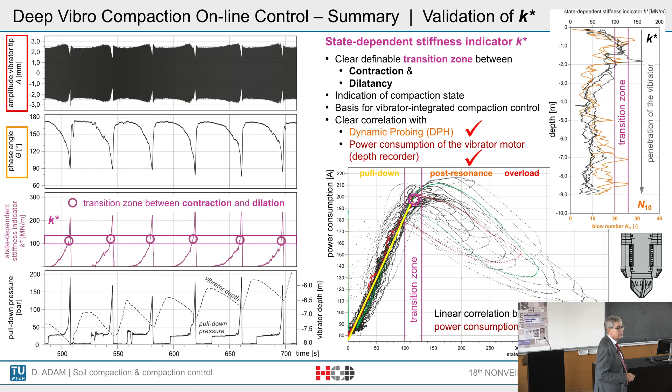So already during penetrating the vibrator, without compaction, you have an online control system now. We patented this four years ago, and the Keller company is just working on implementing it on all vibrators. So in the future, we will also have a continuous compaction control system for deep vibro compaction.

Coming to the last topic now, condition-based track tamping, ballast compaction. And it's a pleasure for me to let you know this is the last Croatian contribution of our institute, because Olja Barbir, she came with me from Vienna. She finished her PhD thesis exactly 13 days ago with an excellent oral examination in Vienna.

On the one hand, I would like to thank Professor Arbanas, Željko Arbanas. I don't know if he's here now, because last week I think he was in Korea. He was, I would say, one of the basic mentors of Olja, because she studied in Rijeka, and also Professor Vrkljan, Ivan, was one of the mentors. I would say both of you are responsible that finally Olja remained in geotechnical engineering, came to Vienna, did her diploma thesis at BOKU, the other institute at the University of Natural Sciences, and then changed to my institute and did excellent work.

And on the other hand, the second reviewer - so Željko was the first reviewer, and Janko was the second reviewer from Ljubljana. He wanted to come, but unfortunately he couldn't be with us two weeks ago because he had a bad injury in mid-July.

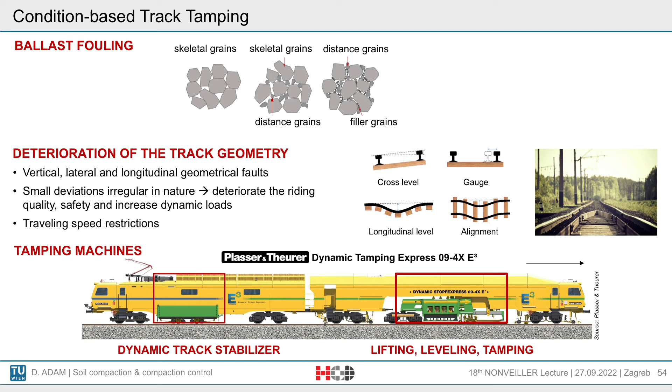The topic of my doctoral thesis and also of the research project behind it was the development of condition-based track tamping. And since this is a topic that's quite new to most people, I would just like to start by answering a few whys and hows. So why do we conduct track tamping? How do we conduct it? And what was, let's say, the motivation or problem statement behind my thesis?

Over the years, due to traffic loads, usually a certain level of deterioration of track geometry occurs. And those geometrical problems are usually irregular in nature, meaning that they decrease the safety of travel and increase the dynamic loads. In addition to these geometrical problems, also due to traffic loads, the properties of the ballast material change. This process is called ballast fouling.

If we have a look at this new, clean ballast matrix, here we have only skeletal grains and voids that are filled only with air. And as this process of ballast fouling progresses, we see that the voids are filled with distance grains and also with filler grains.

Not only does the particle change, but the shape of the particle changes, and with that the characteristics of the track ballast change.

The next question is how track tamping is conducted. The answer is by using track tamping machines. One of them is the Plasser Theurer 4X tamping machine. The 4X stands for it being able to tamp 4 sleepers all together at once.

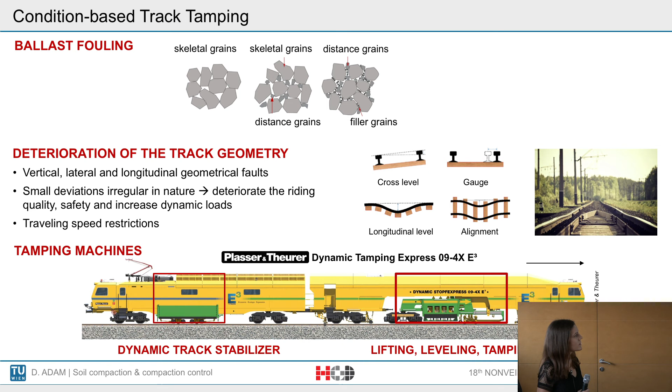The tamping machine consists of two separate parts. The first is the lifting, leveling, and tamping unit, and the second is the DTS, the dynamic track stabilizer. I'll concentrate on the first part of the process today.

It works approximately like this: the track is lifted by the lifting unit and positioned at its correct geometrical level. At the same time it's aligned. When doing this, a void is created under the sleeper, and into this void the ballast material is filled and compacted.

The tamping process on one sleeper can consist of between 1 and 3 squeezing processes, including the tamping unit relocation to the next sleeper or group of sleepers.

The squeezing process consists of 3 phases. First, ballast penetration: the tamping unit, including the tamping tines shown here, is lowered into the ballast, and the tamping tines penetrate the ballast. This is followed by the squeezing movement.

The squeezing movement is the most important part of the process, where ballast compaction takes place. It consists of two different kinds of movements. First the absolute one, which is the closing movement of the tamping tines towards the sleeper, and at the same time they oscillate with a frequency of 35 Hertz and an amplitude of between 4 and 5 millimeters.

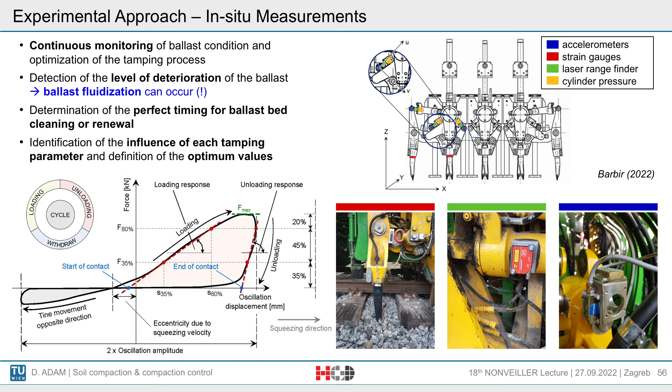The results were presented in the form of load-displacement curves. One such curve represents a single cycle, one single tamping tine oscillation backwards and forwards. With a frequency of 35 Hertz, it has an approximate duration of 28 milliseconds.

We used this system to analyze approximately 10,000 sleepers at different locations in Austria over the last 5 to 6 years. A load-displacement curve has the oscillation displacement on the x-axis and the contact force on the y-axis.

In addition to those two characteristics, we also use the area within the curve to calculate the energy transferred between the tamping tine and the ballast, as well as the inclination in the loading and unloading phase that Professor Adam mentioned before - this loading and unloading response is somewhat similar to stiffness, but not exactly the same. We were also able to determine the exact position of the start and end of contact between the tamping tine and the ballast.

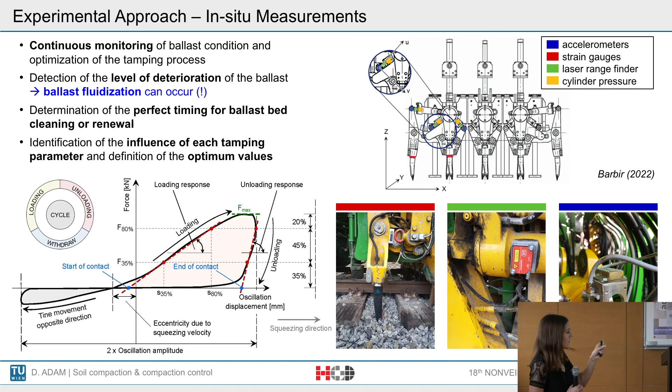In the next step, an effort was made to develop a mechanical model able to simulate the ballast behavior we observed and measured in situ. In short, this mechanical model represents the interaction between the tamping tine and the ballast matrix. It consists of two parts.

Here we have the tamping unit, which is dependent on the geometry of the tamping machine, and on the right-hand side we have the ballast matrix. This was maybe the trickier part to model.

The model is able to simulate both elastic and plastic deformation of track ballast during compaction, and more importantly, it's able to model ballast behavior in different phases of ballast fouling. Why is this important? Presented here you can see some load-displacement diagrams.

The ones plotted in red are from the in situ measurement. Going from the left side to the right, we have load-displacement diagrams in clean ballast, in moderately clean ballast, and in fouled ballast.

We can see really significant differences between different stages of ballast fouling. The maximum reaction force per cycle increases with the progress of ballast fouling, and we can say a similar thing for the loading response and also for the energy needed for compaction.

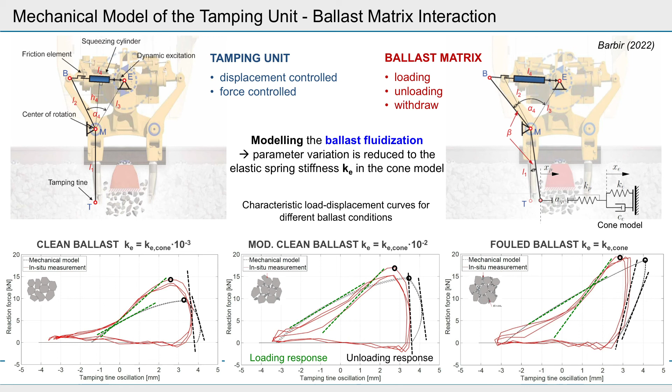The next question to answer would be, okay, we measure this in situ, but why does this happen? We have observed, especially when compacting clean ballast, this phenomenon that Professor Adam also mentioned before, ballast fluidization. In this case it doesn't have anything to do with water, but still under these dynamic loads, especially in clean ballast conditions, we observe a severe but temporary reduction of ballast stiffness and also of ballast shear strength.

So in the next step we try to do the same thing with the mechanical model. By reducing the stiffness, we tried to get similar results for all three phases of ballast fouling. The black load-displacement diagrams are from the mechanical model, and we were able to use the model to simulate this phenomenon of ballast fluidization by simply reducing the stiffness of the ballast.

In conclusion, the most important result from the project is that the tamping machine itself can be used to determine the ballast condition in situ, which eliminates the need for additional machine deployment. We were able for the first time to really prove that there's a periodic loss of contact during compaction between the tamping tine and the ballast, and we were able to observe and measure the triggered process of ballast fluidization.

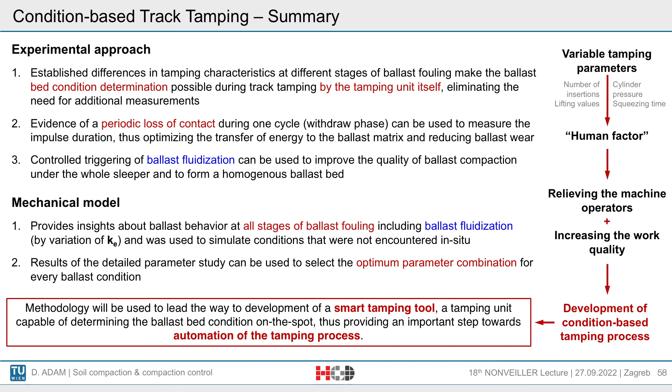As for the mechanical model, it can be used to simulate different ballast conditions, the ones we measured in situ but also the ones we didn't encounter. Probably the most important step is that we can now use this mechanical model to test other parameter combinations, such as different frequencies and different amplitudes, and hope to achieve optimum compaction.

State-of-the-art tamping machines operate with a long list of tamping parameters selected on site by the machine operator, meaning we have quite a high human factor. This is fine for experienced operators, but a challenge for new ones. By teaching the machine to detect ballast condition in situ, we can move toward automatization of the process, which relieves machine operators and increases the quality of the work conducted.

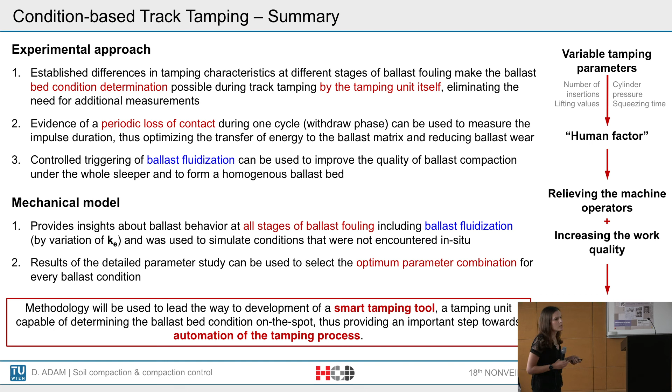This is the reason why we have developed this condition-based tamping process.

Olja, thank you very much for this brief presentation, you did an excellent job as usual. Great presentation, thank you very much. It was really great work, and you might have gotten the impression she was on a leash, but definitely not—it was just the kind of support my young colleagues gave Olja throughout, also in difficult times. Once again, thank you to the Croatian Geotechnical Society for Olja, because she did an amazing job, and I'm really happy that you were at the Institute for six years, and you will always be part of our Institute, as you know.

Okay, ladies and gentlemen, coming to my final remarks now. Unfortunately, we're coming to an end of the presentation of the 18th Nonveiller Lecture.

Citing Terzaghi, already in 1925, when he published his first book on Erdbaumechanik—Earthwork Mechanics at the time—he said soil mechanics promises to become a fairly comprehensive scientific subject. This was definitely true, as we see. With respect to dynamics, in 1948 he wrote in his book Soil Mechanics in Engineering Practice that the effect of vibration on soils may be harmful or beneficial, but it always deserves attention. This was at a time when vibrations were not really part of soil mechanics, because there were more or less no vibrating machines. Yet he already realized in 1948 the importance of vibrations in soil dynamics.

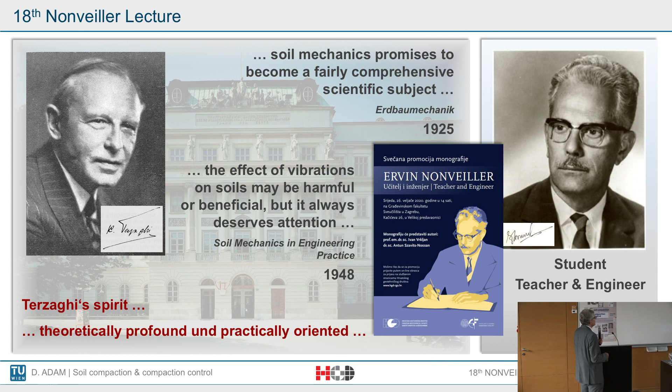And I also would like to thank my brother, my older brother. You have seen him as a little boy. He's professor of mechanical engineering at the civil engineering department of the University of Innsbruck, together with his young colleague, who was part of my consultancy for almost 10 years and also research and teaching assistant at my institute. They always give me such an inspiration, especially with the theoretical background, the theoretical approach.

And so we can see again, there is inspiration from both sides, from the teacher to the student, from the student to the teacher. And we need young people, and I always would like to motivate people to study civil engineering, because it's such an interesting field, and it's just a little spot I presented today, and it is so broad, it is so wide, and I'm really grateful that I may be a part of geotechnical engineering.